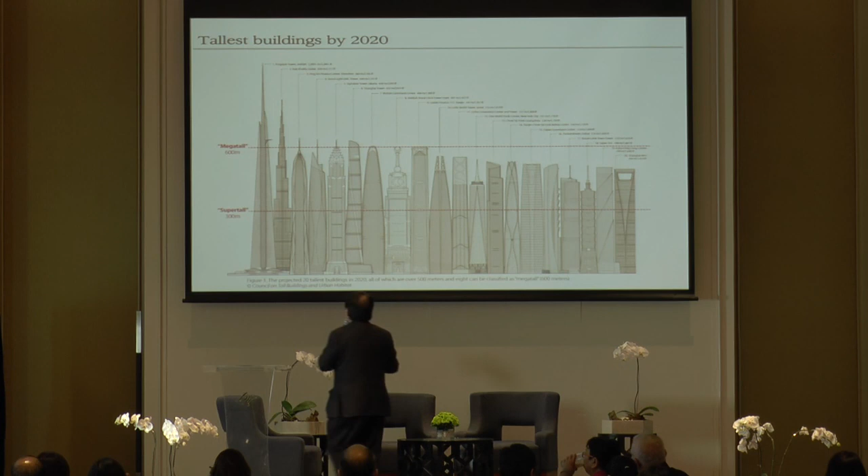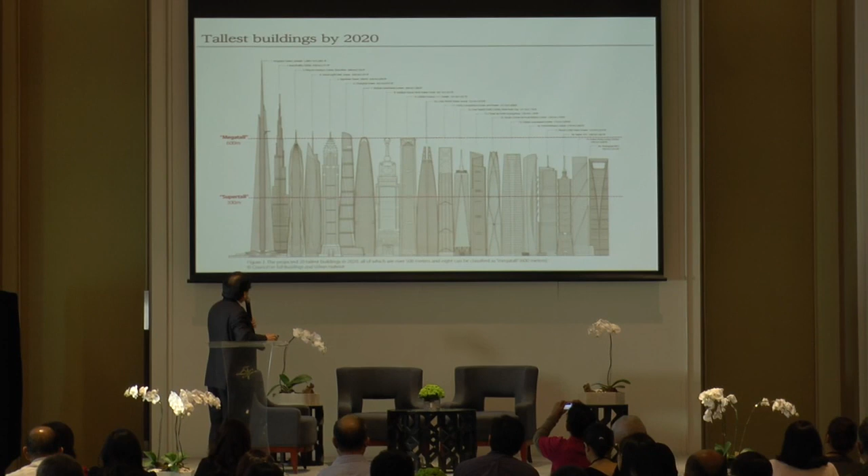The tallest buildings by 2020 -- one will be in Saudi Arabia, the Kingdom Tower, which will exceed 1 kilometer. The tallest now, Burj Khalifa, is 828 meters. And two more will be in Southeast Asia, Indonesia and Malaysia. So this will be the tallest building. There's a shift from North America to Asia.

The Kingdom Tower, by Adrian Smith, in Jeddah -- its secret was the final height, but it's more than 1 kilometer.

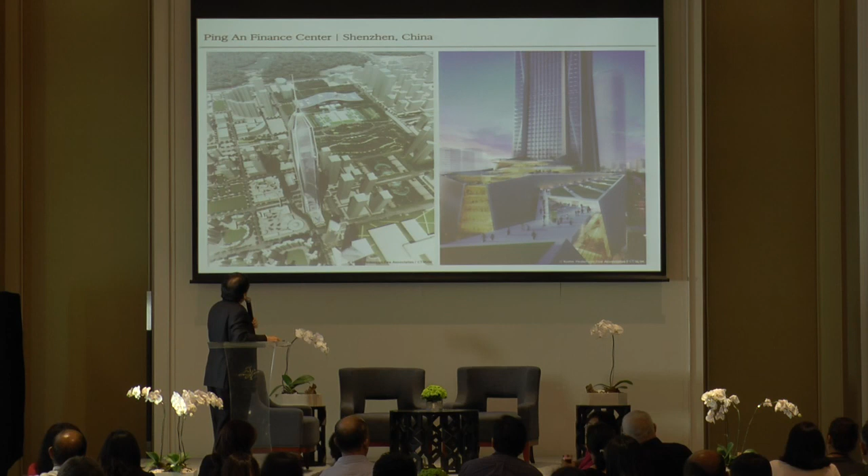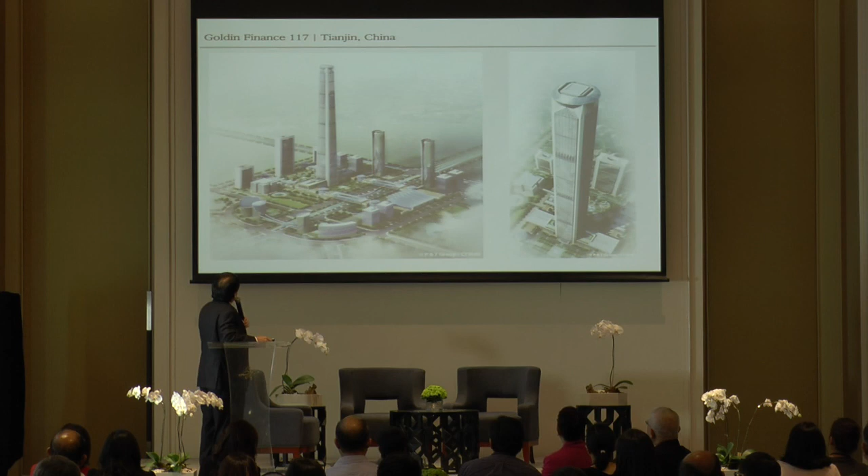China and Seoul, Korea, one of the tallest as well. Then in Jakarta, it will be in the top 10 in the world by 2020. Shanghai Tower, Shanghai, is opening this year, done by Gensler, also my professor at the Harvard Graduate School of Design. And then in Wuhan China, Tianjin China, South Korea, Doha Qatar, Tianjin China, Dalian China, Dubai again, Busan South Korea, and Shenzhen China, and so on.

So why go vertical? We have finite land resources and a rapidly increasing population. If we don't go high-rise -- Carmi mentioned about 54 million more Filipinos, and 70% will go to the cities by 2050 -- we'll need at least 100 new cities, or our existing cities will just sprawl out.

The average employee in Makati wastes 700 hours a year in traffic. So if your economic life is 40 years, you would have wasted 28,000 hours out of your life. That's why most cities now go vertical -- Singapore, Hong Kong, even Kuala Lumpur now, the rest of Asian cities went vertical urbanism.

We, the Philippines, copied erroneously Hollywood and Los Angeles, designed for the automobile, even if only 2% of Filipinos own cars. Walking is not recognized as a mode of transport.

So, some principles for livable high-density cities. Maybe as an aside also, in 1998 we had a conference in Boston on revolutionary ideas in urban planning, and somebody spoke some revolutionary ideas.

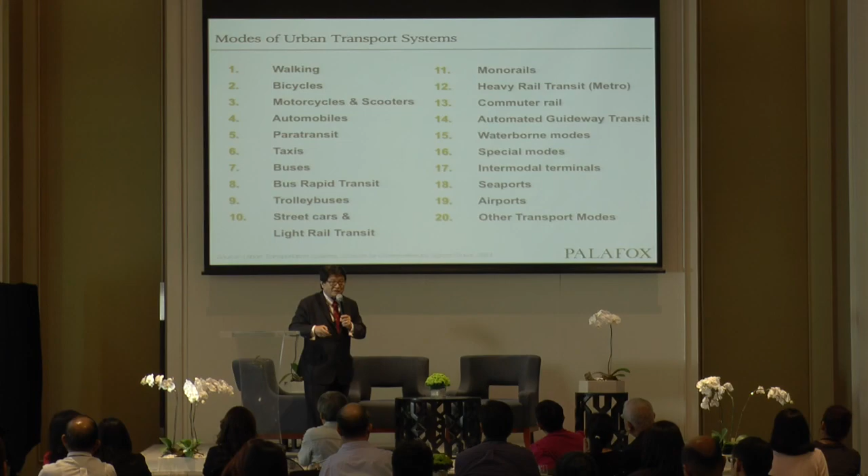Karmi mentioned the one in Seoul, Korea, where they used to have a skyway, then a road over the canal. They removed the skyway, they removed the road, they opened up the canal — now one of the most attractive places in Seoul. One of my colleagues at the American Planning Association mentioned that elevated skyways are like cheating on your diet by loosening your belt. In 15 years, they become elevated parking lots, because the road network is as strong as the weakest link.

The weakest links are the intersections, and we don't know how to manage them — a policeman will park his car at the intersection, everybody stops, and so on. That's why paid parking in Makati — I think I was the first who recommended it. When you park your car in the morning and take it out in the evening, you are reducing the capacity of the roadway by 700 to 2,000 cars per lane per hour. So every vehicle that gets towed at EDSA, you're reducing the capacity of EDSA by 2,000 vehicles per lane per hour.

Anti-snob zoning — it's a revolutionary idea here, practiced in Boston. Every new development must have 20% for the urban poor, and the 80% open market housing, for the urban rich — the profits you make cross-subsidize the urban poor. I went to some of these developments, and the Catholic Church real estate allocates 30% for the urban poor, where they enjoy the same high-quality architecture.

Of course, the sizes are much smaller. And I found out that those buying into this 20% dwelling unit were often grandparents who wanted to be within walkable distance from their grandchildren, because the children are so busy with their careers and businesses. The official name of this statute is inclusionary zoning, but it's better known as anti-snob zoning.

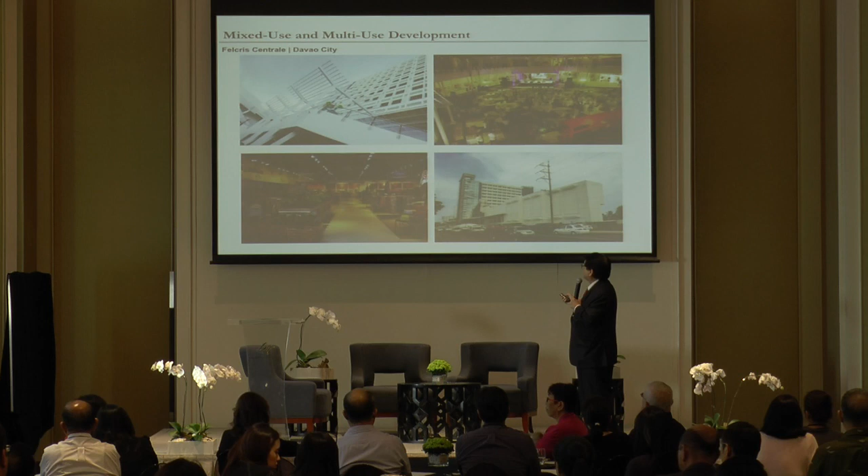And again, the Felcris Centrale in Davao, that we were, Rockwell 1992, if you remember, it was an abandoned power plant. We gave 3 options. One of them is just copy Bel Air. The other one is Copley Place Boston, Embarcadero San Francisco, Pacific Place Hong Kong, Canary Wharf London, and the projects we've done in Dubai, the high-rise mixed-use development.

And we made Pasig River the front door of development, because nobody will probably be allowed to put a high-rise on top of Pasig River. And this is Rockwell today. We did the master plan and the architecture of the first 5 towers.

In our architectural schools here, we were taught that there are only 4 facades: the front architectural facade, the rear facade, the left side, and the right side. For me, there's a 5th facade, looking from above, the landscaping, the groundscaping, how the different buildings dialogue with each other, how that development can connect to the outside.

You can see that we have connecting roads, ramp of EDSA, Kalayaan, outside off-site improvements are connected. Then the Rockwell Bridge, we had a better design for that bridge if Rockwell got the properties across. This is the 5th facade, the groundscaping, the wider urban context.

Make public spaces work harder. Here, we are widening roads, cutting the trees. Mayor Bloomberg closed down Times Square and Broadway, made it into a pedestrian precinct.

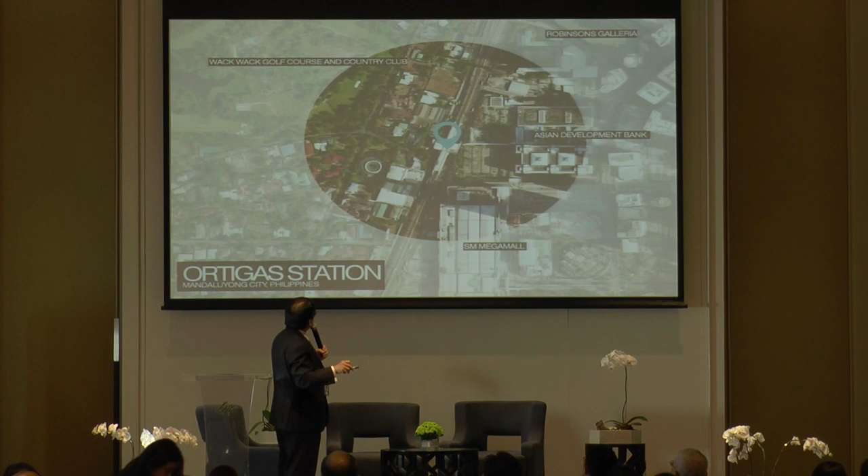Again, Ayala Station, for instance, this is the 400-meter radius. So within this 400-meter radius, there should be high-rise, high-density residential and offices, so you have more people walking to the transit station. Here's a good example of how not to do it: the Ortigas station in the Wack Wack area, the 400-meter radius, and Santolan, a gated military camp.

This is my proposal for Metro Manila 2050, Manila Megalopolis 2020. The Americans proposed 6 circumferential roads in 1945. That was 70 years ago, long before I was born. Until now, we haven't seen the light of day for circumferential road number 6.

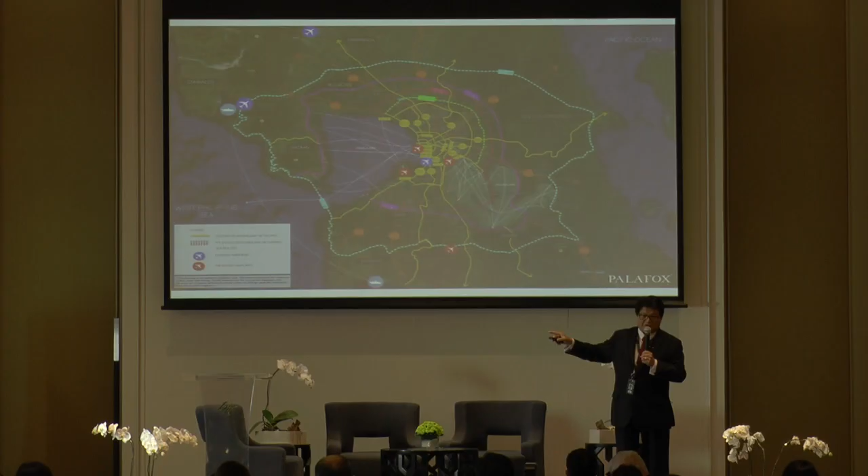So my proposal, by 2050, 10 circumferential roads, including linking Cavite and Bataan, either through a tunnel or a bridge, with a wave breaker for tsunamis and storm surge. So people from Cavite going to Subic don't have to increase traffic volume in Metro Manila, they can avoid it right away. That's doable, along with several major roads and 3 airports: Clark, one in Batangas, and the one in Metro Manila, at least one of those.

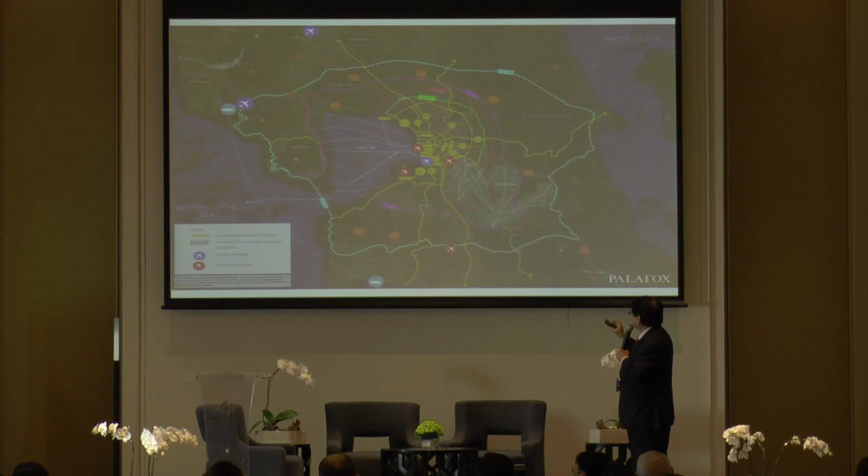And again, water transport, Manila Bay, Laguna Lake, and even a walkway from Manila Bay Walk, Pasig River Walk, then 250 kilometers, the promenade of Laguna Lake. This one links the whole Philippines, it's only 2,000 kilometers.

In 2006, I was invited to talk at the 60th anniversary of the United Nations in New York. I proposed to interconnect all 7 continents of the world. They were all saying, 'oh, this crazy Filipino.' Then the day after, scientists, engineers, planners were congratulating me. They did their calculations, it's cheaper than the Gulf War, linking all the continents of the world. So when I came home, linking the whole Philippines is so easy compared to linking the rest of the world. It's doable, and we're speaking to several funders, many of them interested.

Unfortunately, they are Chinese developers. When you link 2 islands, you're creating 2 gateway cities. Just those 2 gateway cities, imagine the land value appreciation. Somehow I got inspired working in Dubai, because in Dubai everything was possible, and when you put the infrastructure in the right place at the right time, you create value.

And this is still doable. I'm talking to Secretary Jimenez about the Yolanda Corridor, everybody's talking disaster, disaster, disaster. The Yolanda Corridor, we can create it like the Caribbean of the Far East, and the whole Philippines, the Mediterranean of the Far East. It's doable, it can be done. We just need visionary leadership with strong political will.

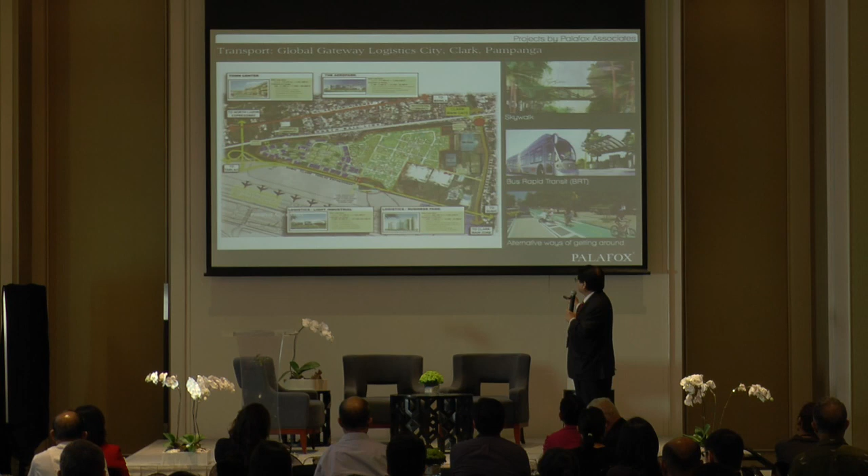And some selected projects, I'll just go for it. The Global Gateway, 172 hectares, 3 billion investment from Kuwait, and planning, the King Abdullah Financial District, which I mentioned to you about, with the 3 levels of accessibility.

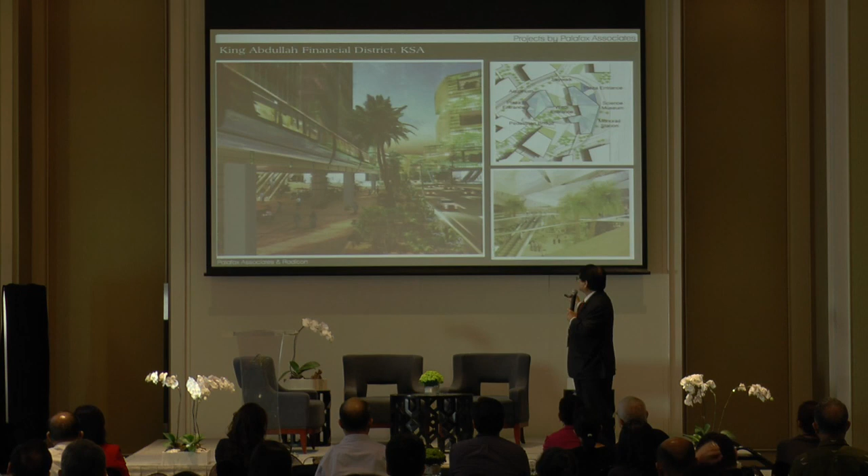And then Rockwell. And of course, we all like to live in environment-friendly cities and communities that are better connected, more accessible, more walkable, more bikeable, safer, better lighted, more convenient, cleaner, with mixed income, cross-generational mixed-use developments, integrating places to live, work, shop, and dine, learn and worship, with healthcare, recreation, and leisure, with some 24-hour cycle activity centers.